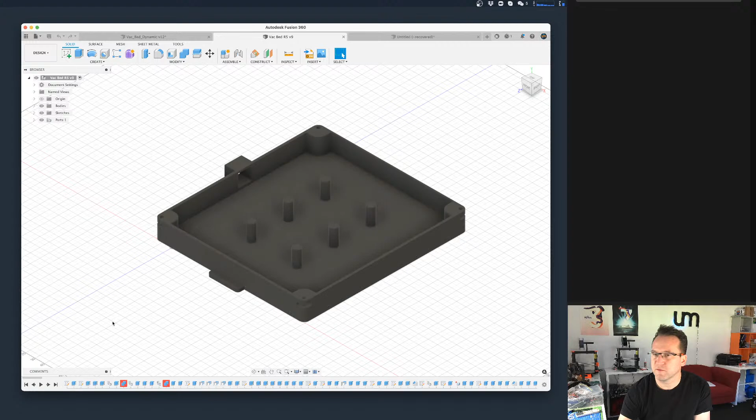vacuum bed file. So I've already got all my vacuum bed stuff, like it's all working for me, but it wasn't built - if you look at the timeline here, it wasn't built in a way that was very user-friendly for anyone else. So I've been redesigning this thing, spurred on by Jon Oxer, who...

So this has been spurred on by Jon Oxer, who keeps reminding me on Twitter that he's waiting for this. So what I decided to do was to make a version of this and then supply the Fusion file for people, and that way they can modify it. So it's all dynamic, and it's got some challenges into how to do it in an intuitive way that doesn't completely build

like a construction timeline that is going to break everything, right? I'm never asleep at this time. Day-night rhythm is, yeah - you obviously, do you have young kids? Or do you have kids at all? I don't know, I can't do the whole sleep whenever I want, work whenever I want anymore, because kids. We're committed to the Northern Hemisphere. You're committed to the Southern Hemisphere, because you seem to be always around. Zero kids? See, that explains it.

That explains it. So the whole thing is, as I said, I should save this. I just had to undo a whole bunch of stuff to make it work differently. So as you can see here, this is this base-driven sketch, and it's all done dynamically.

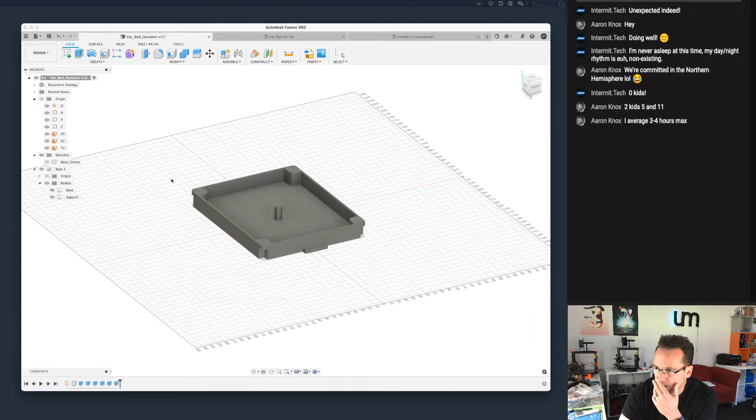So if I go back to here, the parameters, I can say that this is actually going to be, I don't know, 192 wide, and it does that. And I can say it's actually going to be, I don't know, 27 high and whatever, and it recreates all the different sections.

So it's got the screw areas. You can set the screw diameter, I'm using M2.5. The nut width, so this is set here for a square nut, so the idea is that it won't rotate.

On my version, I've actually got it like this, and you put the T-nut in there, but the problem with this is that causes a lot of problems with 3D printing and with overhangs and stuff, and it's very hard to clean this stuff out. So I'm trying to do it in a way that's easy enough to do - you put the screw in, you put the nut underneath, and it's a corner, so it stops it from rotating. So I'm trying to make everything dynamic,

and I should put that back. It sucks that you can't keep this parameters window open all the time. Anyway, so what I'm working on at the moment is the supports.

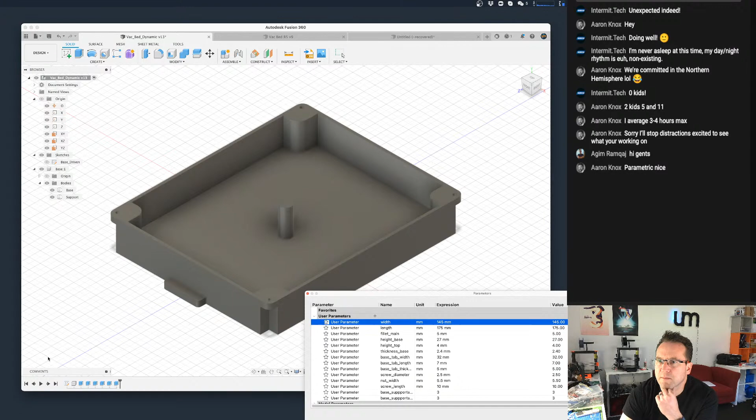Hey, Agim. So originally I had the supports as a dynamic layout inside here - so that's the support there. The supports were driven dynamically in the sketch. The problem was if you set it to zero, there had to be at least one of them. Otherwise it couldn't create an extrusion for something that wasn't there to start with, that you added.

Anyway, it was confusing, so what I'm doing now is I'm putting it as part of this sketch object. I really hate this whole thing, anyway, whatever. I'm using a new mouse, by the way, a wide mouse at the moment, and I'm really struggling with it.

It's a completely different shape and size mouse, and it's really annoying me. I've got new mice on the way.

I've got a separate support now, and I'm about to set up a pattern. I'm going to do a rectangular pattern, driven by this stuff. I can do formulas in the expression, but it's difficult - having it all tied together is painful.

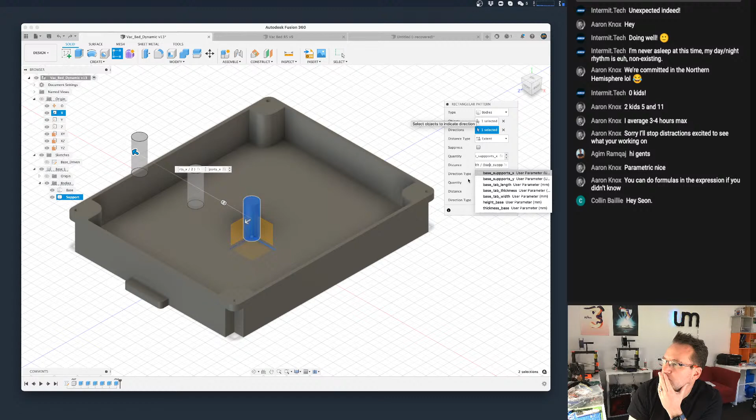I'm going to have to do some to the left, some to the right, because I can only do an extent or a spacing. Or I move it. Right, that might work. Okay, let's undo this.

So that's the extrude, but I want the extrude to happen after. No, okay, so I need an extrude, then I need a move. This has to move. Right, that's what I need to do.

So I need to move that body, and I'm going to be moving it minus width divided by the X support.

And I need to move it - which way is Y, that way? I need to move it minus, doesn't really matter, minus length, divided by support Y. Okay.

Yeah, I can't start it on the left and the right inside the sketch, but yeah, that's what I'm doing, Collin. And if I make that minus, if I make that plus, it'll be the top left corner. Okay.

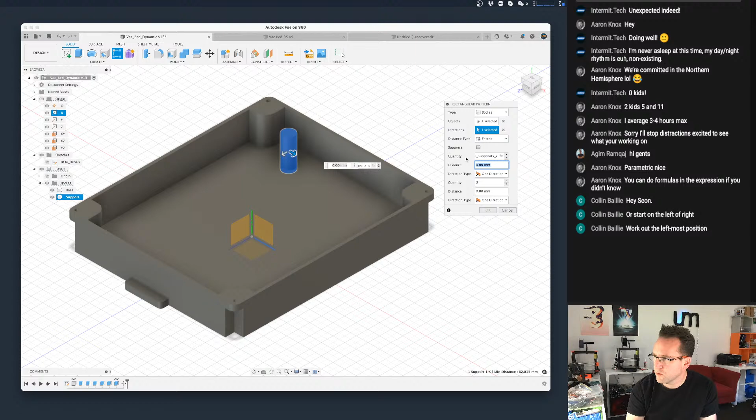I don't really have to set that, I know what I'm doing. So there's going to be base support X, and it's going to be minus width. It's going to be plus, it's going to be width divided by... that's not right.

The distance is going to be... right, so the whole width divided by 3, or divided by the number. Oh, right, I'm going to have to do it spacing now. Maybe? It'll be width divided by support X. Oh, but the offset.

What? I don't understand. Width divided by 3.

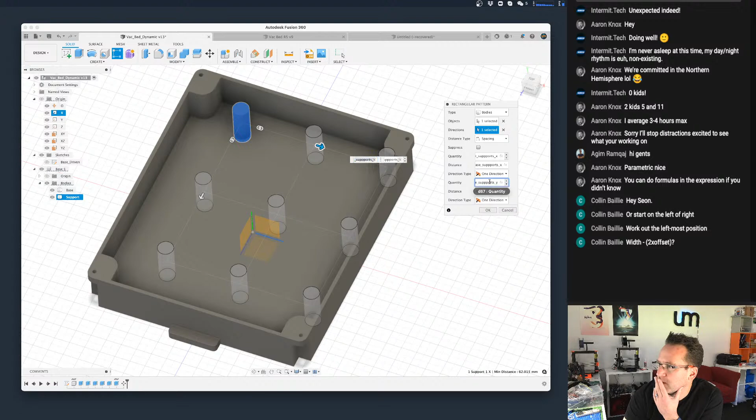So that one's correct. Why is that correct? Width minus 2 of the, but it shouldn't be, because look at the Y - the Y works, it's 3 and 3.

Oh, unless this move wasn't right. This move must not be in the right position. Okay, actually the Y doesn't work, because if you look, the Y is offset as well. So it's the initial move, I think, isn't right.

I think the distance, all these distances are right. So I'm going to just OK on this for the moment, and I'm going to just work on the... maybe, yeah, the move isn't right.

Why is it not stored, the move? I've edited the move. This should be showing me the values I had in here to get it there. See, that's there.

I want to edit the feature. It should show me the move values.

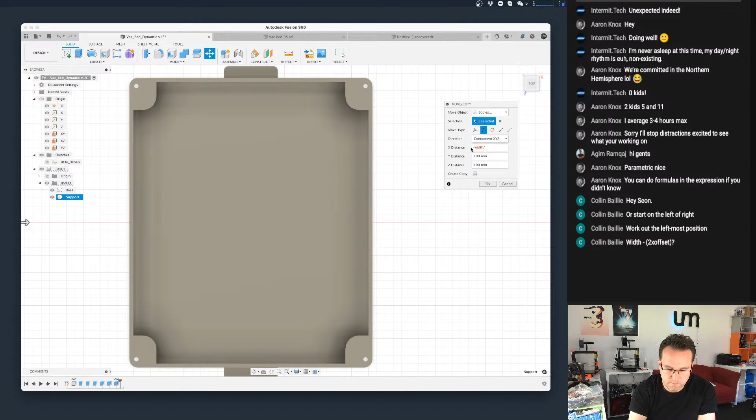Done. It's fine. I want it to go negative width, divided by... that looks further over than it did last time. This is length divided by...

Oh, is that not, is that, which one's Y? Oh, is that done up and down? Okay, that's annoying, because I changed the, if I change it to design.

You know what? Okay, that just broke that. This is awesome.

Hey Bruce, perfect cooking stream.

Okay, undo that, we're going to do that again. This has got to be a bug. This has got to be a bug in Fusion, that it's not remembering what the move was.

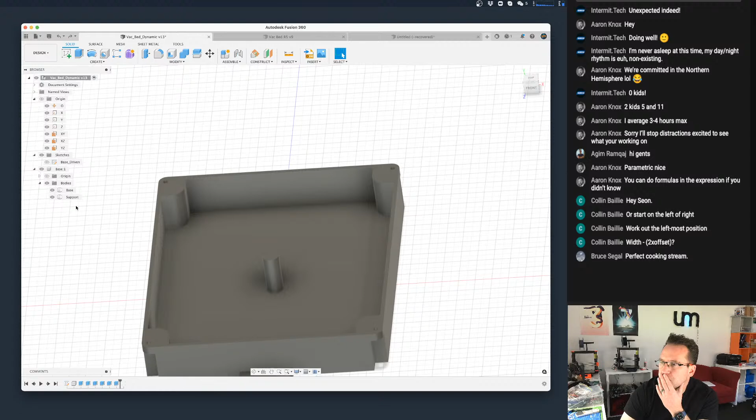Why is that going in the air now? I don't understand why it's going in the air. We divided by...

Where exactly are you trying to put supports? I missed that. I'm trying to, so based on how many supports you say you want on the X and the Y, I want them centered throughout the thing. So if I now move that over, right.

So that looks right, except I did the wrong direction. But if I come back in here now, see, I've lost the settings. It's not remembering the formula.

Okay, but maybe I can remember this one. I can go reverse this one.

Okay, so this is now placing them in the right spot. I don't understand why they weren't before.

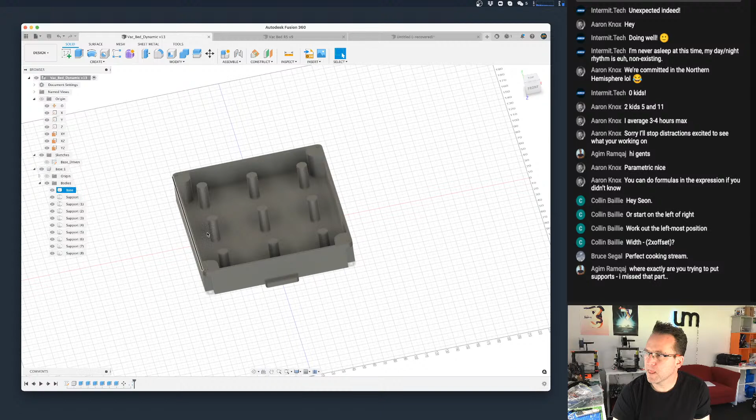Let me save this. Okay, so the idea is, I don't know if this move is going to work now, because the formula's not there, right? So if I now say, go and change this, I don't think it's going to work.

If I say I only want 2 supports on the X, you see, it doesn't move the Y. It's not moving this first one. It's not saving the parameter in the move.

So this isn't going to work. Like I should be able to say I want 5 and 5 if I want lots of support. It should recalculate this position here. And it's not recalculating that position.

I want people to be able to, remember, I want this to be completely dynamic. I want someone to be able to just go and modify these values and they will get all the pieces they need ready to export to 3D print, where they don't have to do any modifications to any geometry and whatever else.

But this is a problem because... I know what I can do. I know what I can do. Okay, I need to change this.

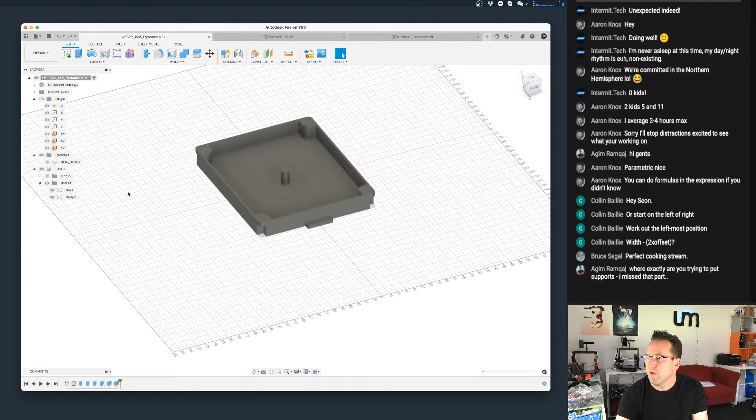Okay, what I'm going to have to do is I'm going to save that. Actually, I've got to rename that. The move has to happen inside the sketch. That's what I'm going to have to do.

So right now it's sitting here. I'm going to have to actually make this be, it's got to be constrained to... hello.

Right, this is going to have to be the negative width divided by support X. What's wrong with that? Negative width?

Oh, didn't like the space. Hello? Negative width, divided by, support X.

Oh, I know why, because it's constrained to the center. Okay, I need to kill, which one is it?

Okay, that's annoying. I'm gonna have to, how big is that? 5 millimeters.

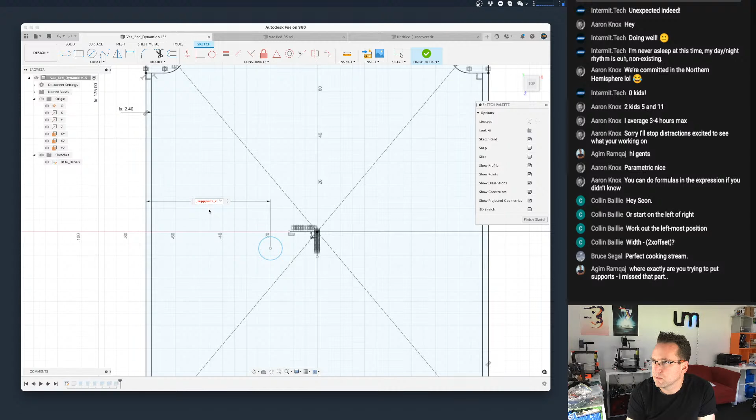Maybe I wasn't. Well, maybe that doesn't make sense doing it that way. If I'm locking it to the edge, it should be 1/3. No.

Right, I actually need to do it the other way around. I need to do it from the center. I think that's why. Wow.

There is a reason why I don't show this stuff on streams. Negative width, divided by support X. Why is it not letting me do that?

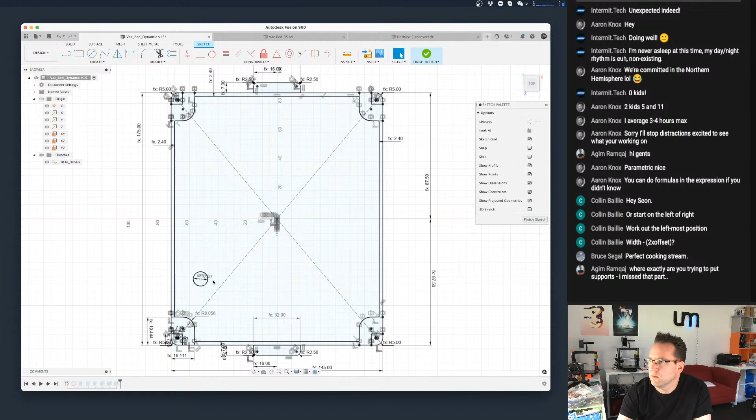I don't understand why it's not letting me do this. Circle, 5 millimeters. 10mm circle diameter, and I want to do...

Oh, maybe I need to do it for my construction line. Maybe negative width. See, it goes red automatically. I don't understand why is it going red? Oh right, I'm saying this is a direction and I'm trying to make it negative. That's not going to work. It probably would have worked before.

Okay, let's try this again. It's because I'm telling it to be this way. Actually, it's got to be from the center. Okay, this and this. Can't do it from the center. Move away. Right, and it's locked again. Oh my god, okay, I give up.

I give up, I give up. I was trying to keep the same one. Hey, Dutch Maker, I know I'm making this look really, really, really way more complicated than it needs to be. And you know what? It is.

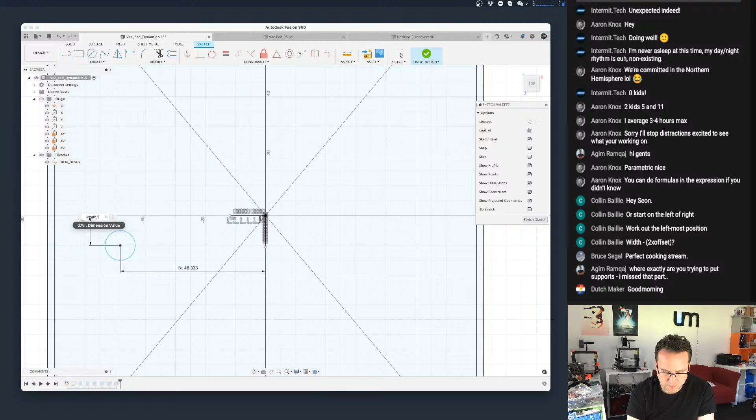D. Okay, I want this to be width divided by support X. Okay, and I want this to be... someone is pinging me... this has to be length divided by support Y. Okay, so that puts it in position, and that will now move based on the design. And this extrude is now... isn't the extrude.

The extrude is broken because I picked a different item. I need to now select that for the extrusion. And that's going to be a new body. Okay, support, so...

Save that. So this will now... it's frustrating that it's not in the center, right? But this should now... so the problem with this, if I say I want one support, it's not going to be in the middle. Oh yes it will, divided by 1, negative width divided by... no it won't. What happens if I make it be 1 by 1? Right, 1 by 1 is going to be out there.

Okay, I'm going to leave the 1 by 1 just for a moment because I think I know how to solve that. The formula is going to be different. It's going to be width divided by 2, half...

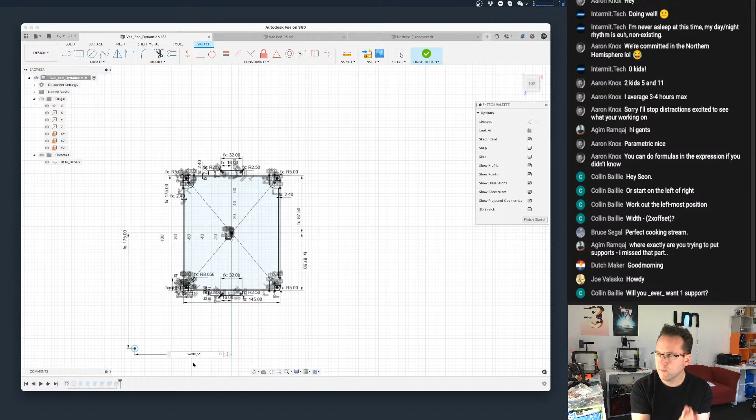Oh no it's not, I don't even need that. It's just going to be minus... no, the distance is going to be support X divided by... got 2 of them, I want it to be... oh my god, doing my head in. Will you ever want one support? I don't know, I need this to work and not break. Hey Joe, I need this to work and not break for people, for edge cases that I'm not aware of.

I don't want to have to be constantly... yeah. I don't know, maybe if it's small enough you only need one support because there are already supports on the corner, right? There are already supports here on the corner. If there's only one support, it should be...

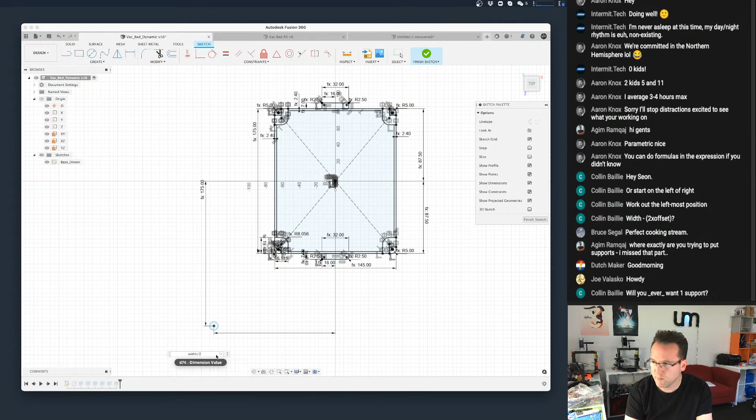So let me... oh my God. Width... it's the width, I don't want the width. Width divided by 2, I want half of that, and then I want that divided by...

This would work easier if the pivot point was on the bottom left. If the pivot point of the whole thing was here, this would be super easy. The fact that I need to move it to the left and then make them go to the right, when you can't do that within an array.

No, width divided by count plus 1 is even worse, because if it's width divided by 2, it's still going to move it. If there's only 1, it shouldn't move it at all. It should be in the center. The distance should be 0 if there's only 1.

So if it's width divided by support x, times... base support x minus 1.

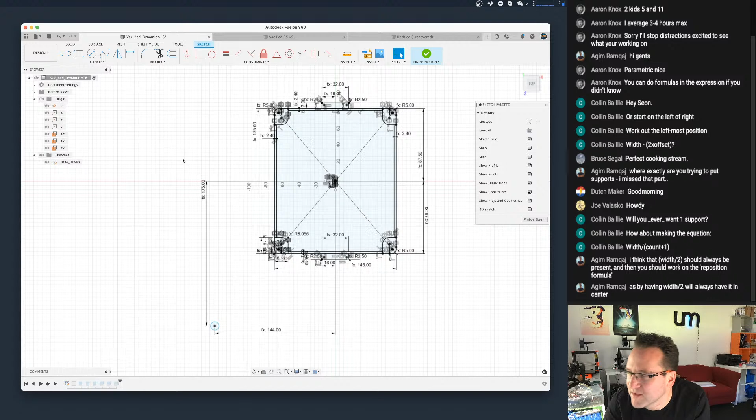No, I think that width divided by 2 should always be present, and then you should work on the reposition formula. As by having width divided by 2, we'll always have it in the center. No, it won't have it in the center - it'll only have it if it's pinned to the middle. Width divided by 2 will always move it away from the center. 0 will keep it in the center.

The only other thing I can do is pin it to the left and the bottom. So let's try doing that instead. Let's get rid of this and this. I think the issue is that I'm pinning it to the center and I can't get a 0 value.

So I need to go D. Okay, the dimension from here to here should be width divided by 2. We should put it to 0, put it to the middle, yeah? Minus... how many of them are there? There are 3, minus width divided by support x.

Well, I didn't like this. Width divided by 2. Oh, because I'm on the wrong side. Okay, let me redo that. Okay, let's put it back here. I need the... hello, I said move over here. Thank you. I think I need it to be the other way.

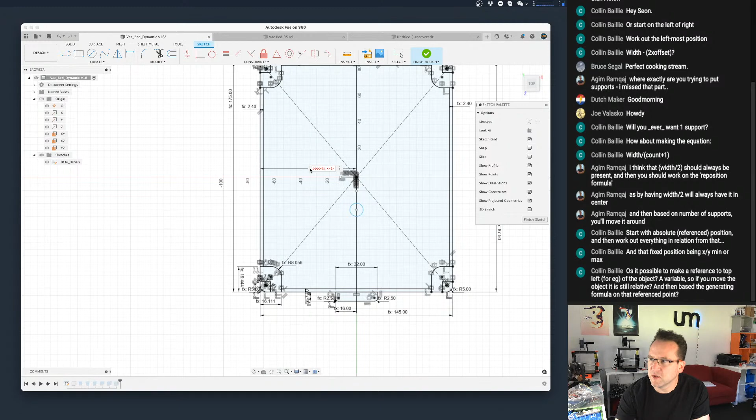I don't understand why width divided by that minus 1. It's not letting me put brackets on it, but I've put brackets before.

Wait, divided by 2, divided by 1. Or divided by 2, divided by thing. If I now make it 2, that's right. If I make it 3, 1, oh actually no, it's not right. Divided by 2, it still needs to be... that's going to put 1 there, then it's going to put 1 there.

Maybe. There is, but there isn't, but it is a reference point. A reference point is exactly what I'm doing now. The circle becomes a reference point.

Everything is, yes, it's all parametric. As you can see here, there's center rectangles, because it has to be pinned somewhere, and so it makes sense to pin it to the middle, because there's plenty of other stuff that needs to reference the middle as well.

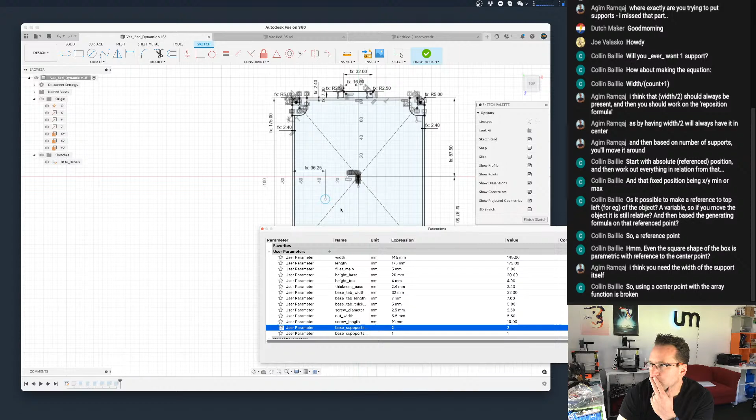That should be divided by x minus 1. I just don't understand why it's not letting me do brackets. Oh, that time it did. Wait, that time it let me do a bracket. What just changed?

One of them, will that break? 3. See, that's not changed. Okay, that's not working.

Still want the minus here. You need the width of the support itself.

So using a center point with the array function. Well, no, it's not broken, it's that you can't do it. With the array function, it's going to be this many left and this many forward. It's not what I want, I want this many and start here and go across over the pivot point. The array function is a 2D array from a point. So what I'm trying to work out is how to get to the point, but how to get to the point dynamically.

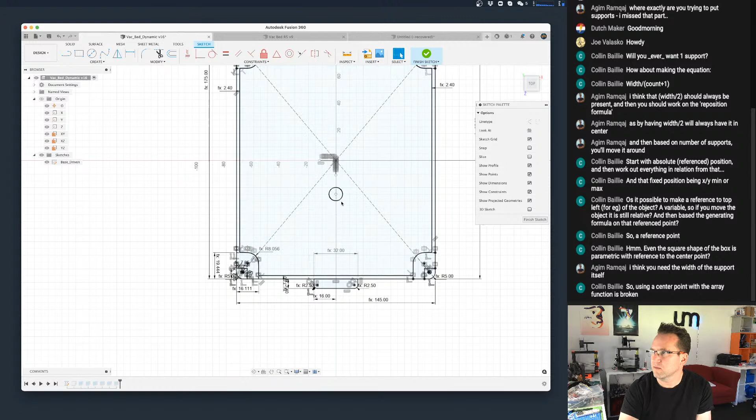It's just not letting me use things in the formula, which I don't understand because I've done stuff like that stacks of times. So unless I can make a formula in here and just use that. I know you can do that.

It is possible to create, like I'm pretty sure I can say, I can create a, if I call it support bottom, so support X left, and support pivot left, and I want it to be...

I don't think... where's this coming from though? That's the problem. Width, I want width divided by 2. That's my center.

And I want minus width divided by supports. Okay, so it let me do it in here, and I don't know why.

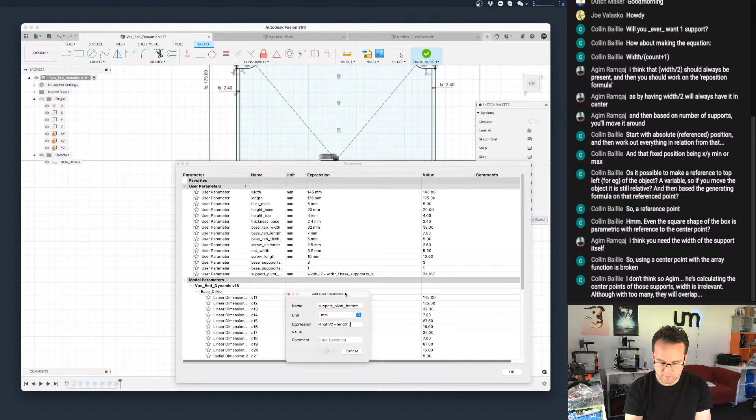Bottom, support pivot bottom, and this is going to be length divided by 2, minus length divided by base supports y.

Except there needs to be... so this top one's giving me a positive value of 24. I'm not sure that's right either. See, that's giving me bottom left. Right, that has to be minus 1.

That gives me a divide by 0. Oh, hang on. No. That's going to give it to me from the center, right?

Again, it depends where I'm grabbing it from. But this, for 1 and 1, this should be giving me a 0. Or this should give me a plus.

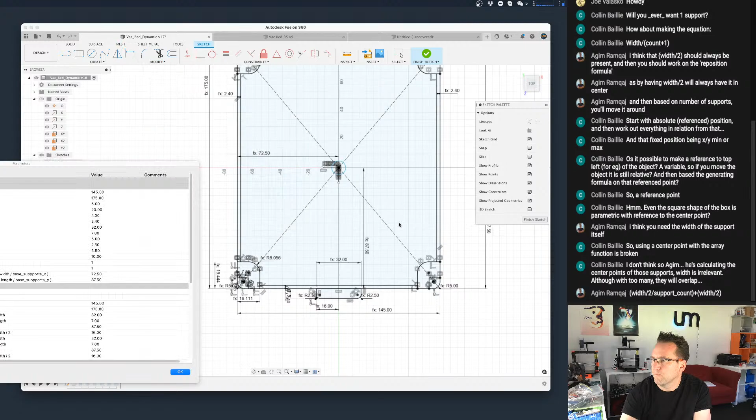And if I now modify this and say... so this is the bit that's been tripping me up for so long that it has put me off finishing this, trying to work this specific thing out. So if I have two supports on the X, damn it, and 2 on the Y, that's not right because it's going to give me 1 there and 1 here.

Oh, hang on, is it divided by 2 divided by? No. Width divided by 2 divided by support count, plus width divided by 2. Don't think so, you can try it. Width divided by 2.

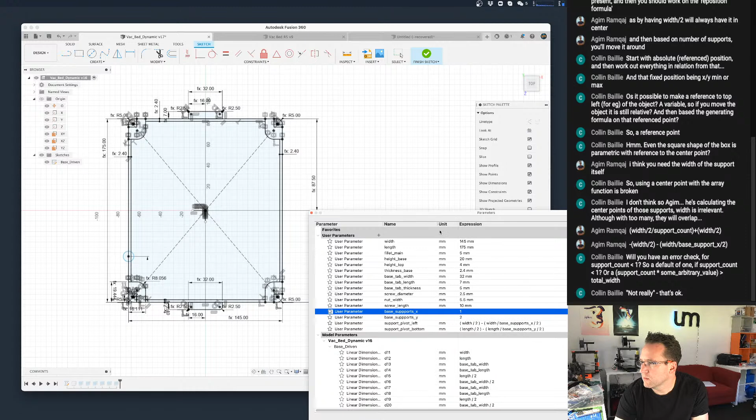Wait, what happened there? Is that the Y? No, 2. 1, no, that's not correct. 3. Yeah, no, it's not correct either. Want it in the middle.

Is the initial support parametrically generated, and then you need to make the array. Yes, now, I had all this working fine as an array in the sketch, but you can't do that. Because if someone enters 0 for support, the extrusion never happens. And then if they go and change it to 4, then there is no extrusion, and it breaks. So that's the problem with that.

Don't I just want divided by... This is just so annoying. I'm just going to go back to where I was originally. If I have 1, I want it to be...

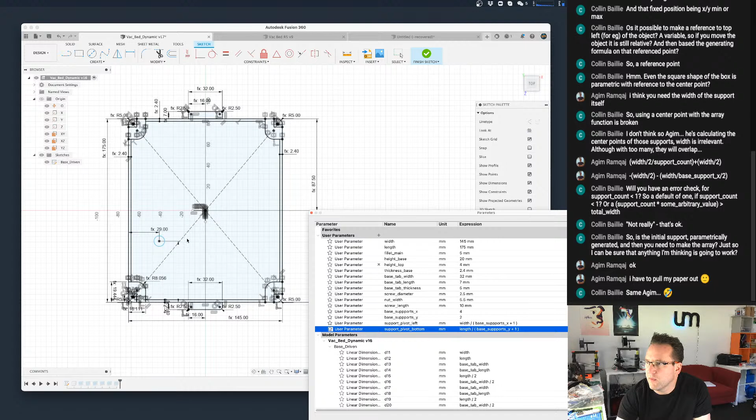Length divided by base support Y plus 1. 2 by 4 will give me 1 there and 1 there and 1 there. Like 2 by 2, okay, 3 by 3. I think this might be working. I think this might be working. Finish.

So now if I do this, I want to create a pattern, and I want this to be - I hate how it does that. This needs to be supports X, and it's going to be spacing of... spacing of what... of width divided by

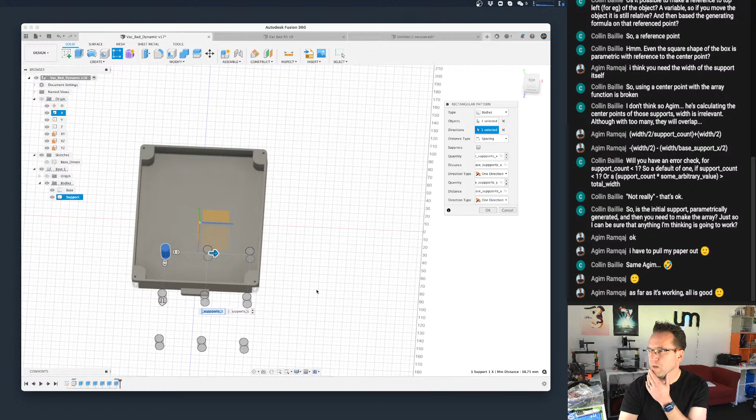support X. We're gonna have the same problem where I'm not going to be able to... support Y, and this is going to be length divided by support Y. I'm not going to be able to put brackets again. Oh, I didn't do the direction. See, this is the same problem again, where it's got to be divided by plus 1. And you watch, it won't let me do the brackets. And I'm going to be back to the same thing as before.

Oh, it did - it let me do the bracket this time. Oops, didn't mean to do that. Right, so let me do the brackets now. It must have been over-constrained before somehow. Distance is minus length, base plus 1. There we go.

Okay, so they're in the center, and if I now go to here and say actually I only want 2 by 2 - 2 by 2, they're in the center. And if I say I want 5 by 5, which is ridiculous, they're in the center. Oh my god! Oh my god! Now the problem is these are all separate objects, right?

Is the top of the page plus or negative? You don't work it out. Okay, so 3 by 3, right? Oh, interesting. Why is that?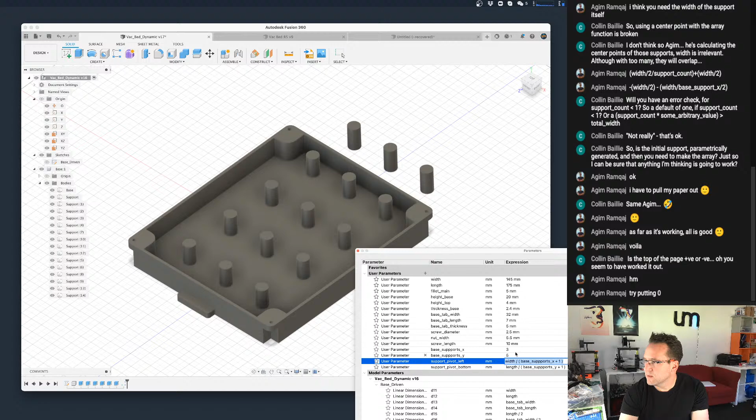I must have used the wrong spacing. Hang on, I might have used the wrong term for each one. This might be the Y. That's that way, and then this one should be that way.

No, I thought I was using the mix, but I'm not. I am, I'm using the mix. That's why. Okay, yep, I did, I had one mixed. Of course I did, this is Xeon.

Everything's hard. 4, 2, 1 by 1. Yay, yay! Okay, 3 by 3, just put them back to 3 by 3. Okay, that was way too hard.

So the problem is, okay, that's the base. So that's the base. Now I need to work out how I'm going to let someone cut the hole in the side for the vacuum.

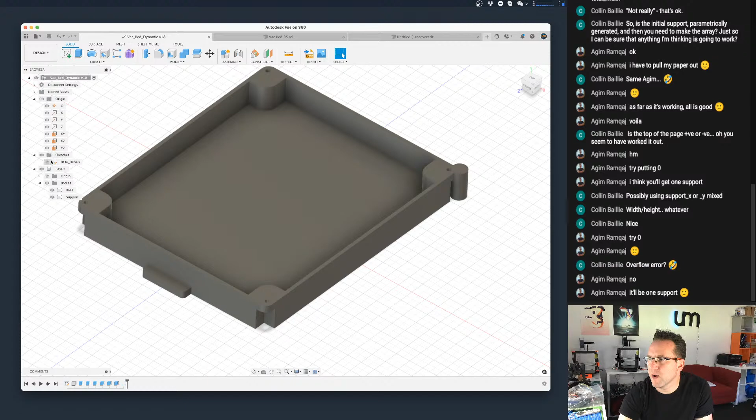Thanks for wrecking it again. Thank you, much love. Right, so...

Oh actually, wait, I forgot I did it in formula. So, base plus 1. So this needs to be, but that should be, even that's 0, it should be divided by 1. It needs to be divided by 2, and there should always be 1. So this needs to be, I think I can do this, min 1, comma, maybe I can't.

Expression entered failed, unknown result provided. I can't remember how to do a max and a min.

You're out! Quindor, stay awake all night. Thanks for joining, mate, appreciate it.

I need to... need to go to Fusion 360. What is it? Parameters min max.

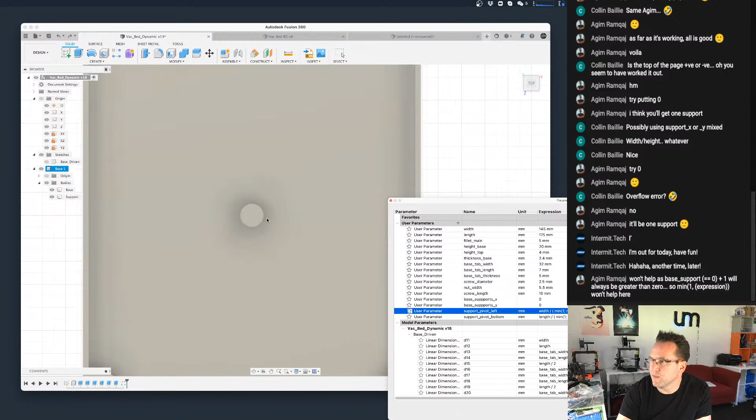As I said, the syntax on some of these things is a little bit weird. Oops. Okay, so if I now go at 0, 0, see that? It's giving me 0, it's giving me 1 now, and 1 should be the same. And 4 are now wrecking the position.

Now I broke it. Why is this broken now?

No, I need the min part. The min part is what's stopping it from going over to the side. But the max part wasn't the problem before. Removing the min, how? The problem is it's staying at 0, 0 all the time.

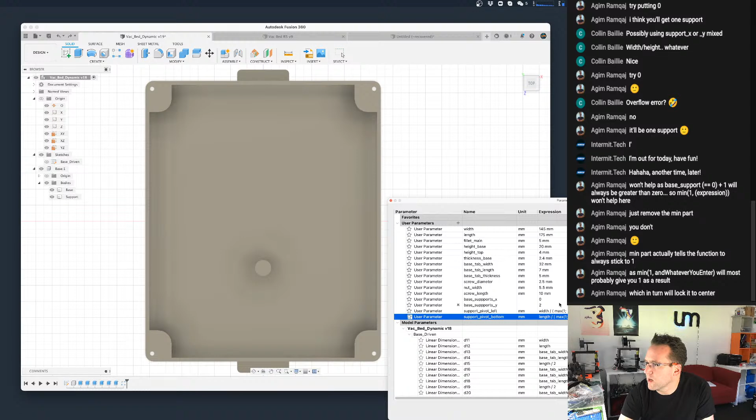Except that's not now, why is that not multiplying out? 1, 3, where are they? 2. It's multiplying out if there's something on width and length.

Right, that could be my formula here. Y, Y, X, X, that's right. Quantity, y, change parameters.

2, 1. If I go 0, it's doing 0 on the y as well. The position is not, but the number of. If I go 2 and 0 here, see, it's doing that on both.

So that's not the min 1 expression. It's using the count value. Right, but that's the same as saying that's 1. Right, I see what you're saying. The zero is giving it a divide by error.

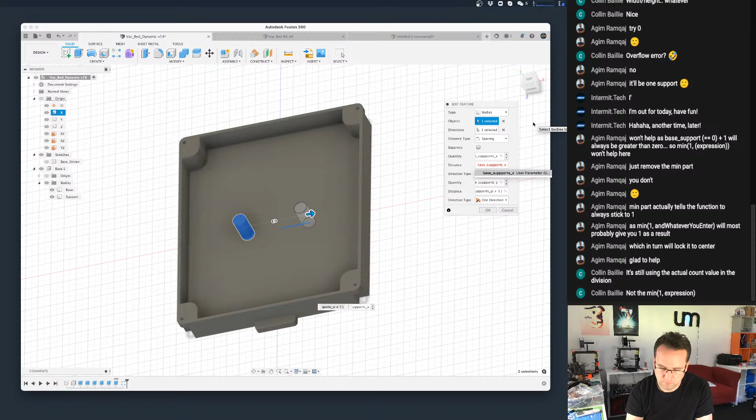Did that save it? I don't know. So I go 0, no, it didn't. So 1 works. If any of these are 0 though, it wrecks the other one. Gosh.

Why do I do these things to myself? Why do I ever volunteer to release these files? Seriously. I've spent more time trying to work out the maths on this than I spent designing the original version.

Oh, hang on. It's this way. The direction's flipped.

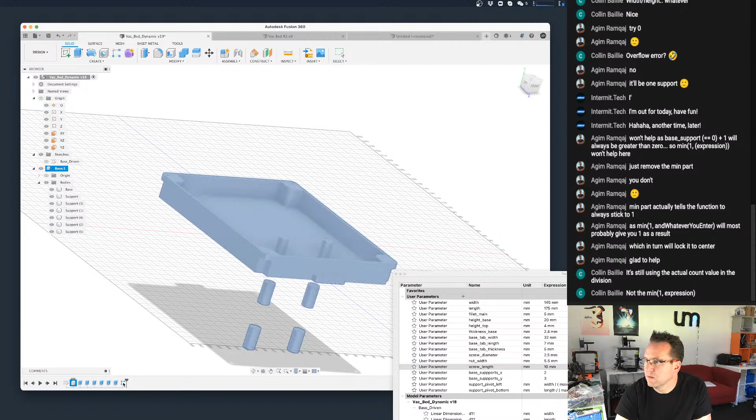That's why it looks like it's not working. Look at that. What the hell?

Oh, no way, there's a symmetric option. There's a symmetric option. And the symmetric option would allow me to do it from the center. Maybe.

I want this to be... just bear with me a moment. I'm going to break it all. I'm going to break everything we've done.

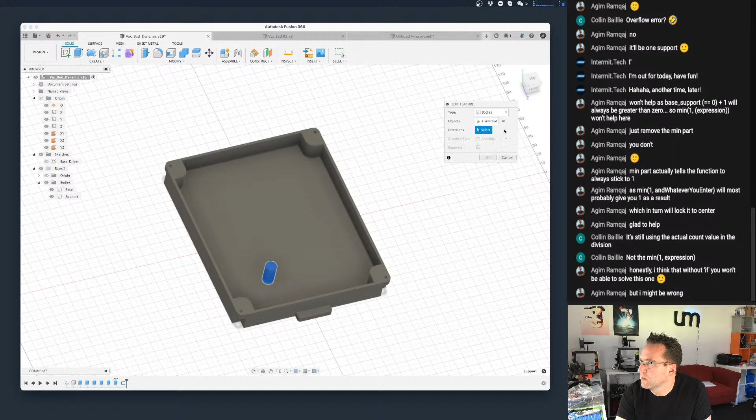I don't understand why it's going in that direction though. It should not be going up and down. Directions are... why can't I select the directions?

Okay. You're going to all scream. Scream, scream for ice cream.

I'm going to... oops, I'm going to do a circle. I'm going to do it 10. Finish.

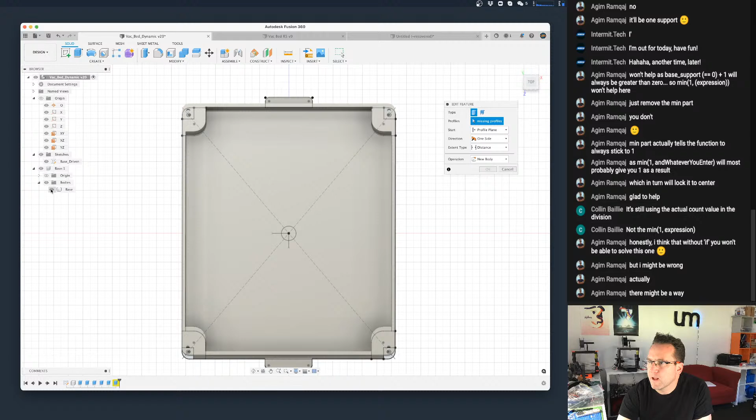And then this, I'm going to... okay. And then I'm going to do create pattern using this body, and I want it to be...

That's okay, I'm going to make it. It's going to be support, it's X, and it's going to be symmetrical, and it's going to be width divided by...

We're still going to have the 0 problem, but we'll get to that in a second. I don't know what I've got it set to at the moment.

Why isn't—see, symmetric should be going both directions. Why isn't symmetric going both directions?

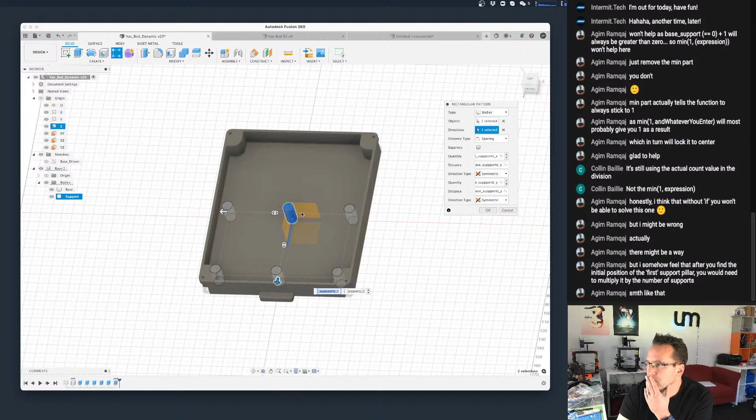So that worked, you see that? But why is the other one not working? I don't actually know what I've got it set to. What have I got these values set to?

2 and 3. If I go 1 and 1, 1 and 1 puts me in the middle. 2 and 2. Oh, it's going to be alternating. 3 and 3, see that?

It's alternate. It's got to be an even number. It's got to be an odd number. It's got to be an odd number. If it's not an odd number...

Okay, so symmetric is not what I thought. You see that? It's got to be 5. It's got to be an odd number.

But I somehow feel that after you find the initial position of the first support pillar, you would need to multiply it by the number of supports?

Yeah, I'm not sure that's going to help me either.

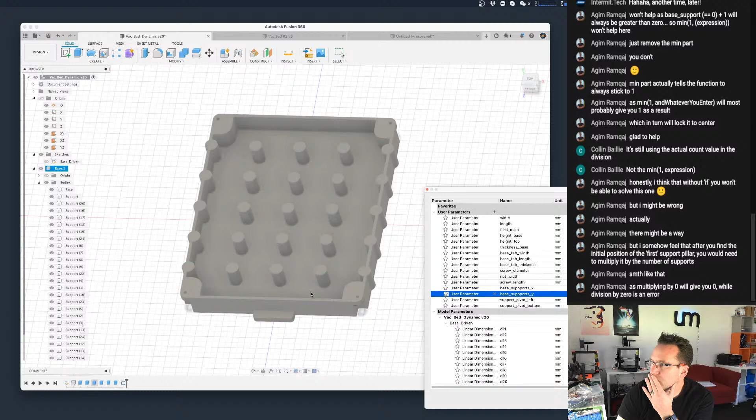We had it before, and I think what happened was my dimensions got broken. God, I'm going to spend the whole stream doing this.

Feel free to let me know in the chat right now, or in the comments after if you're watching this later, if you're sick and tired of watching me struggle on these streams, and if you want me to just stop streaming. Because I'll totally understand if that's what you want. Totally understand. Totally.

I think my dimension on this got totally broken. So this should be support pivot left.

And this one should be... I think this one here got broken. Support pivot Y, which is why they started going up and down.

Why is that not liking that one? No, that's not right. I said support pivot bottom. That's the one.

4 AM speaks for itself.

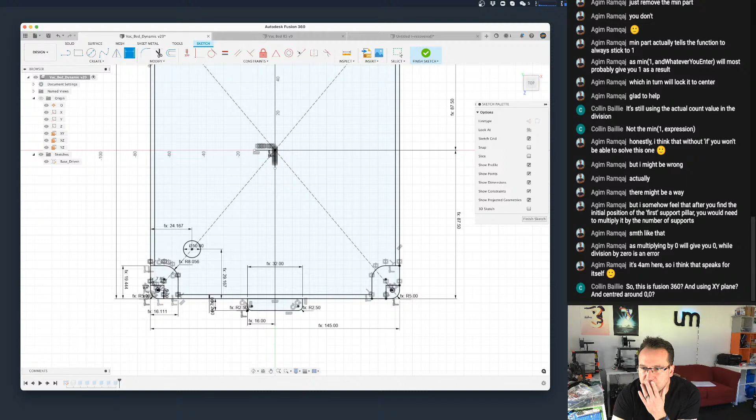So this is Fusion 360, yes, using the XY plane and centered around 0. For the sketch, yes, that's the 0 mark in there, you can see. 0, 20, 40, 60, 0, negative 20, 40, 60. Yep.

You work and listen to my streams, sure, but this must be frustrating for you. I know it's frustrating for me, so, you know. I'm glad I'm doing this on my other channel, though, and not on my main channel, because people will stop watching me.

X, and that's width.

And direction... no, direction, and that will be negative.

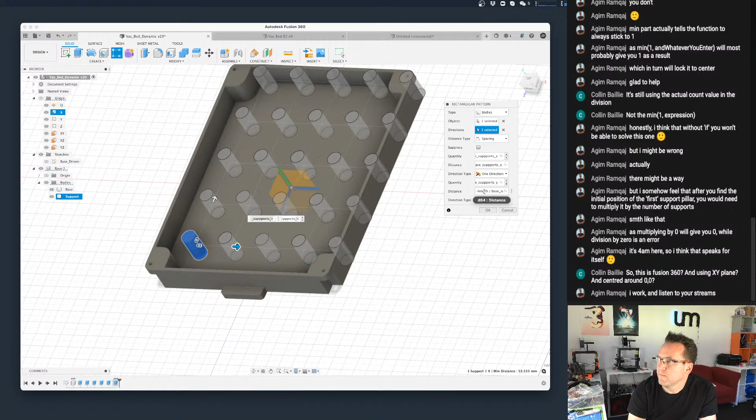And it's going to be the +1 again. It's going to be divided by max 1 x plus 1.

Okay, and this one's got to be bracket max 1, comma support y, plus 1.

Okay. Hey Joe, the brainstorming streams teach a good problem solving lesson. This is not a good problem solving lesson, as in, I'm not doing a good job of showing you how to solve it.

Okay, this might have it. This might be it. I enjoy a challenge like this. I just think me doing it on a stream is not great.

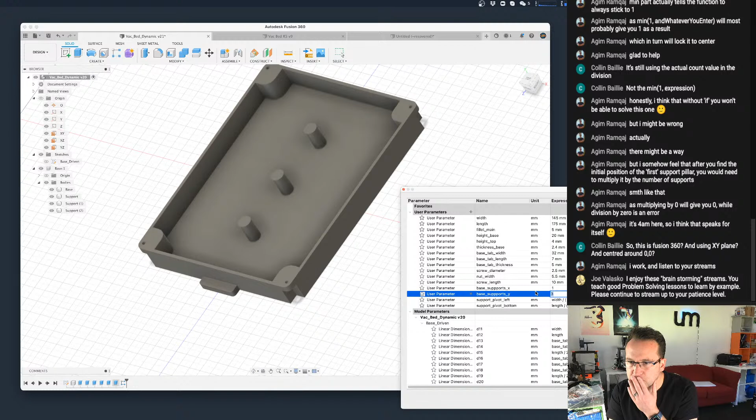It's close, very close. I feel like as long as it doesn't break, that 0 is just a case that we don't support. I mean, if someone sticks 0 there and it does something weird, that's okay, as long as it doesn't break. I think I'm okay with this.

I can do 2 by 2, I can go 3 by 2. Okay, we're gonna move on from this.

Oh my god, it's 10 past 1. I've not had lunch, I've not even had breakfast. Ooh, sorry.

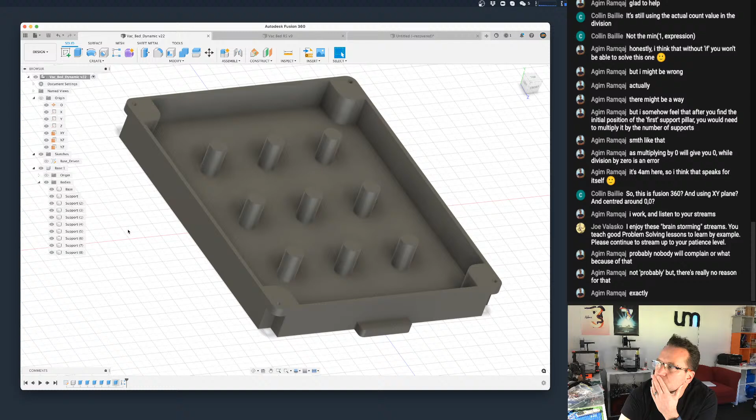Right, what I can do, instead of doing it as a sketch though, is I could do it as a hole.

And I could... so the distance is going to be 2 times thickness, length, width, base tab thickness. Which one is it? It's the base thickness, and I want it to be simple.

The width of it is going to be the height, times 0... so 80% of the base height. Yeah, circle's not great. Circle's going to reduce the amount of airflow.

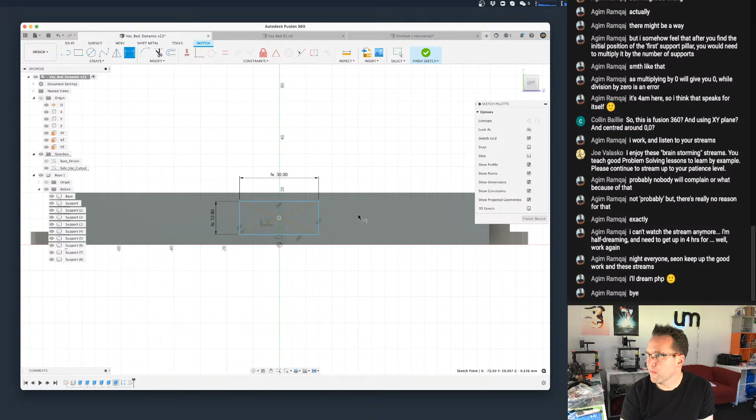I don't have anything on the same plane. That'll be interesting. So that'll be length divided by 2.

No, it's going to over constrain it. Oh, of course, what am I doing? I can't stick that on a... I'm in the sketch. You're an idiot, Seon.

And that wasn't in the center. Got to turn the base off. Actually, turn them all off. Okay, so let's try that again.

I want the center to be... going to be height of the base divided by 2. No, actually I want it to be divided by 2 plus base thickness. What?

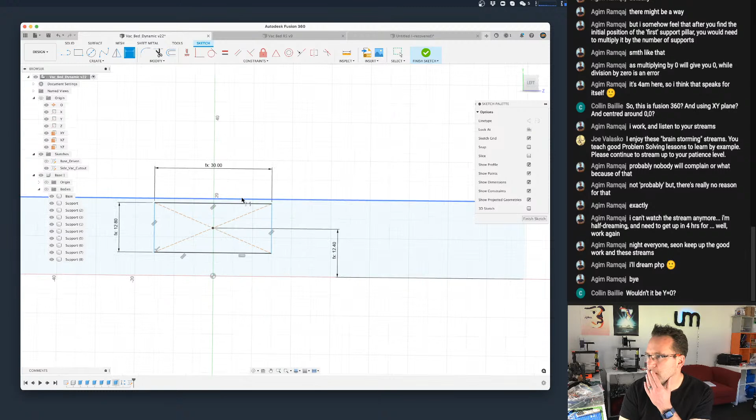Wouldn't y equal 0? No, y equals 0 is here, and you can't do a y equals 0. It's got to be relative to the side. If someone makes it higher...

So I need this to clear the bottom, right? Because there's a base there, like there's thickness to the base. But I want it to be right on, actually.

Okay, even easier, easier. Although it might be over constrained. I just want that to be thickness base.

Right, and I want this to be... right, I shouldn't have even done that. Right, I didn't even need center one. I want this to be thickness base as well. Okay, that's what I want.

And then I want this to be... this is where it's going to get a bit harder.

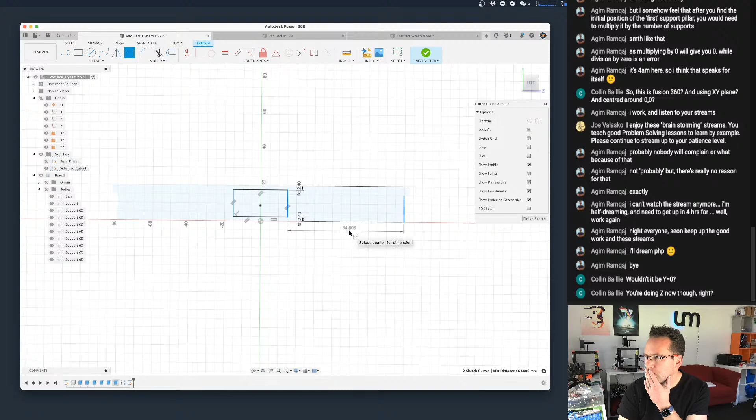I don't have a center reference, so I want this to be length divided by 2, minus height. Well, that should give me a square.

I'll do the same thing here. It'll be base, what was it, length divided by 2 minus height. Right.

I'm doing, no, it's not Z. It's not Z, it's the side. See here? And I want this to extrude minus thickness base. Is that the right amount? And it's going to cut.

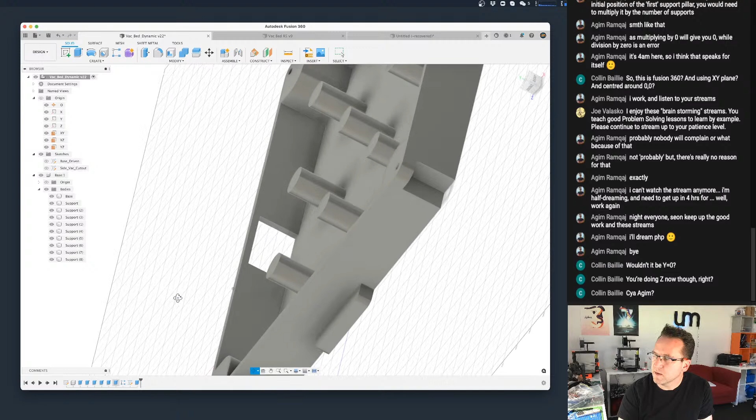Okay, so there's the hole on the side that the vacuum is going to connect to. And so I should, if I save that, I should now be able to...

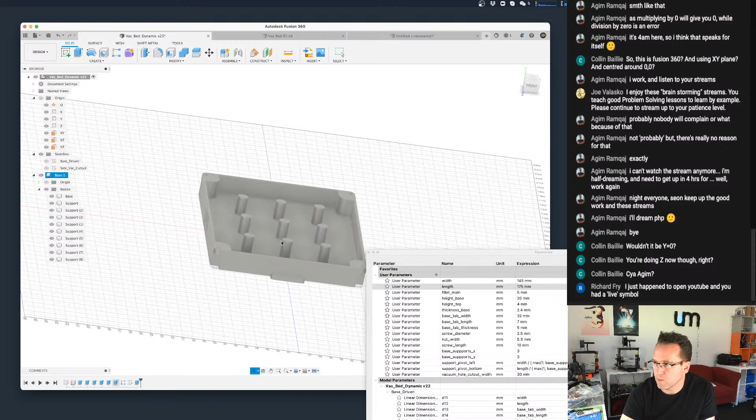By the way, the 145, 175 is based on my size, so people are obviously able to change this if they want to. Okay, so that's working. But what I should have also done is, in the sketch, I want to add some screw holes.

And this is going to be screw diameter. And it's going to be how far away? 5 millimeters. Yeah, that's fine. And this should be...

I don't know if I'm going to... how do I do the center of the length? Can I get to the length of that? Or am I going to have to just make this... it's going to have to be the center of this to this. No.

Hello. 1, 2... thank you. So this is going to be height base divided by 2. Okay, so that should be the center, and then I'm going to copy and paste that. And that is going to be there to there, is going to be, hello, no, D. There to there, going to be 5, and there to there is going to be height divided by 2. Okay, so I got screw holes.

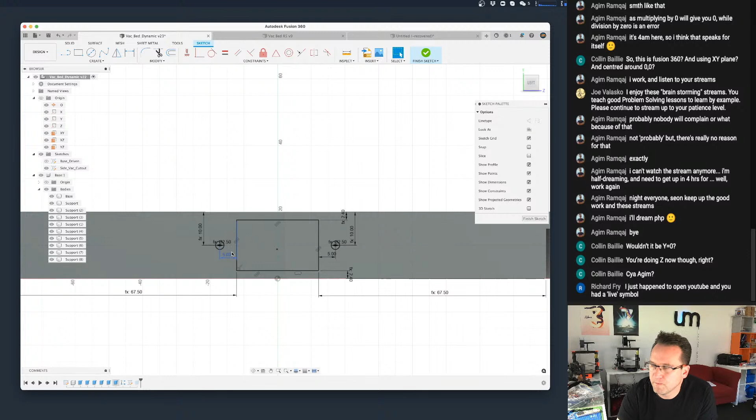Now what I can also do though is, the problem is everyone's adapter is going to be a different size, like everyone's hose is going to be a different size. So I'm also going to need a... just thinking out loud right now. I don't want to do that. I want to use the same sketch for the adapter outside.

So I'm going to need another rectangle that's going to be, I have to be careful if I lock it or not. I'm just going to do it out here for now, so I can then constrain it back in. I want this to be...

Going to be thickness. Okay, and that is going to be thickness. And that is going to be, um, 10, and just for now, I can always change that later, 10. So...

And then what I also need is a circle centered to the box. And I don't remember how big mine is, my adapter, but right, I can't do that yet. I need to add another modifier.

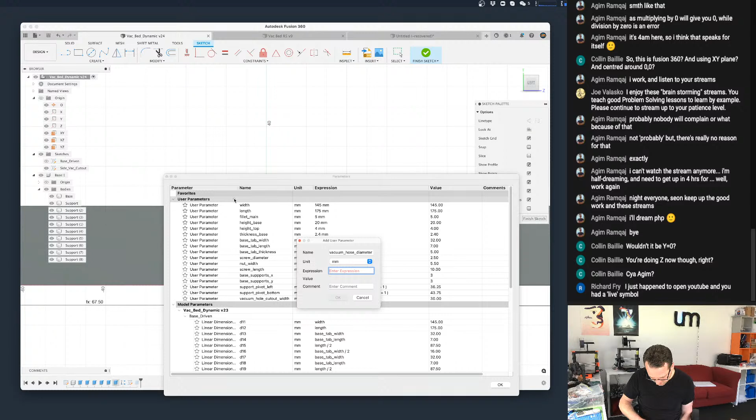Diameter is 31. Oh, it gets wider. Let's tape it a bit. 31.3, we're going to call it. For me, anyway, 31.3. Other people can change it. 31.3.

Okay, so now I can do a circle that is in the center of this. That is the vacuum hose diameter. Wait, that's looking for the radius divided by 2. There we go. Okay.

Finish. So now I can turn that on. So I can build the adapter out of this now. So I can grab this and...

Think, Seon. Think. Well, actually, I need to also... I need to add the screw holes in the wall.

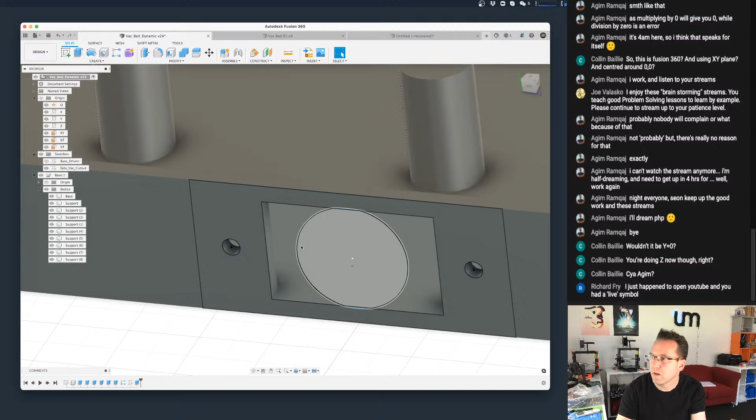Okay, and now I need to create a new extrusion. So extrude, you pull that face out, and that one out. How big am I going to make this? I can't think, just for the moment. I mean, this is going to be pretty ugly, but 10 millimeters.

So the idea is the vacuum plugs into that. You can even go, maybe, can't quite go all the way through. We're going to have to adjust. You see there's got those little bits there, right? That's what the vacuum plugs into, but I want this to be a separate piece. It won't be part of the 3D print, because I want people to be able to print it flat.

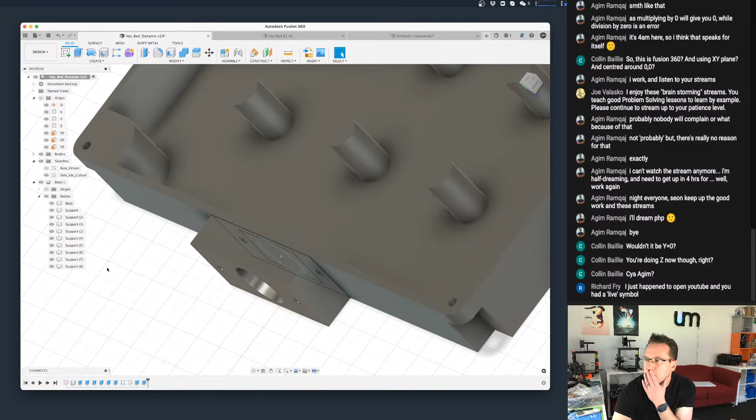So this is going to be its own body. Just for the moment, I'm going to call it - I was going to do that, and it's going to be interesting. I don't want it, I actually want it to be in a new component. This is going to be called vacuum adapter. Right. Extrude.

And that, I want that to be in here. So this is now a body in here. It's a separate piece. So this is the vacuum adapter, still driven from the same data, but not part of the base. If that makes sense, see that? So that'll get screwed on.

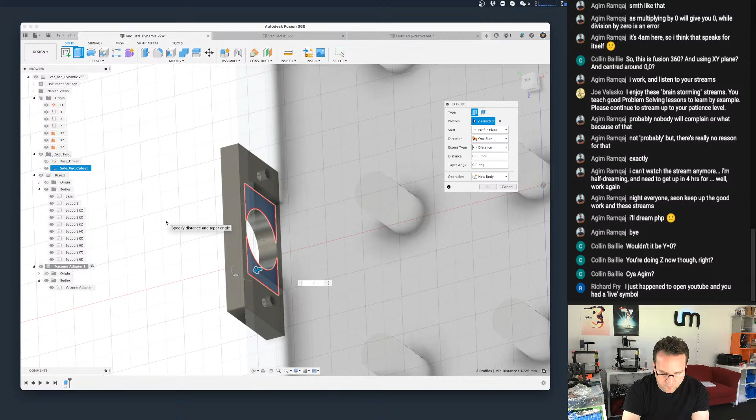And what I could actually even do is try to think which way it's going to get printed. Printed that way. If I actually extrude that and make that negative thickness, I mean, the tolerances on this is going to be tighter.

But that could then slot in. So it'll make the seal even better. And it would print face down. The problem is the vacuum hose hole is actually bigger than the space we've got for the height.

But if I go here now and say - but this is not going to make it dynamic. Like if this was 22 millimeters high, it's readjusted itself. It's not moved the circle higher. Right, the circle stayed still. Everything else moved, but the locking of the center of the circle didn't work.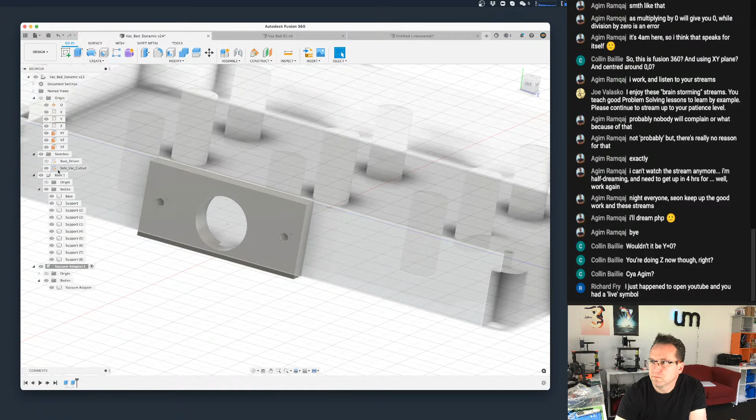Okay, that sucks. I'm gonna have to do that not by tracing the center. I'm gonna have to do it mathematically. That's a pain in the backside. So see this circle? It didn't move. So what it actually needs to be is D.

You see this needs to be height, base height divided by 2. Now it's going to move with it. Finish. Right.

But if someone does this, changes parameters, and they make the height 17 millimeters, it's going to cut right through. See that? Now, I mean, that doesn't really matter, because at the end of the day, it just means they can't get the vacuum cleaner in any further than that little space.

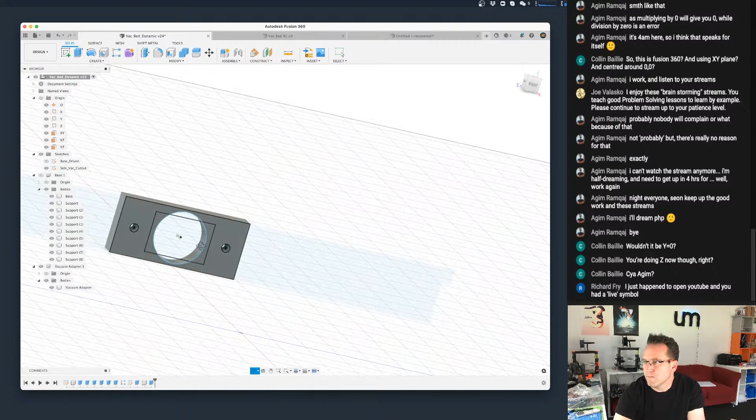Does that make sense? I hope that makes sense. Like, that'll still connect, but I'm thinking of getting rid of this. It's going to make it really hard. Yeah, I'm going to delete that. Anyway, so, but they can make this bit thicker, which will still hold the vacuum. So that's going to work.

It's going to work. So they screw that piece on, and that's how they attach their vacuum, and that's all dynamic. At some point, like if they make it really, really narrow, like if they say it's like 12 millimeters high, well, that's not going to work at all, right? See? But I don't know how I'm going to prevent people from doing that. Like, there's almost no point. If it's for a stencil printer, like, you need to be able to get the vacuum in.

So, yeah. At some point, I have to stop being concerned about the model breaking if someone does something stupid.

Okay, save. Now, we need to do the top.

Wow, what's the time? How long have I been streaming for? Almost 2 hours. Holy moly, Batman. Okay, that wasn't even funny.

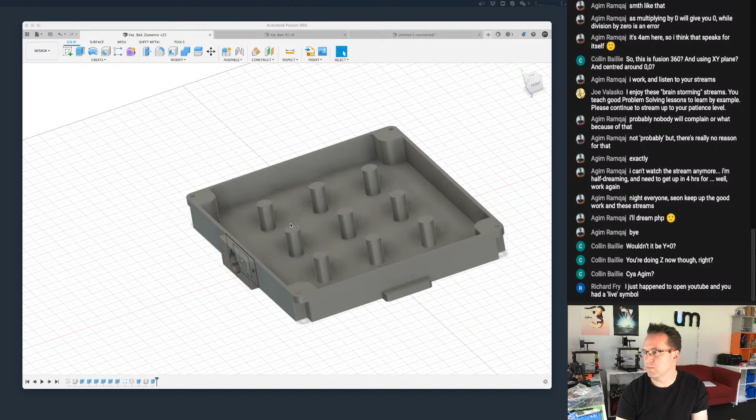Okay, we should look at doing the top. So that's going to be another component, at least the start of the top anyway. This will be the base top. Top or cover? Call it a cover. This is going to take a lot of work, by the way.

I'm just going to turn everything else off. This is where it's going to get interesting, because I don't necessarily have everything I need in this sketch right now. Well, that's not true, I've probably got enough. So we're going to extrude this, and this, and this.

Hey, Marius. Surprise, surprise. Imagine seeing you here.

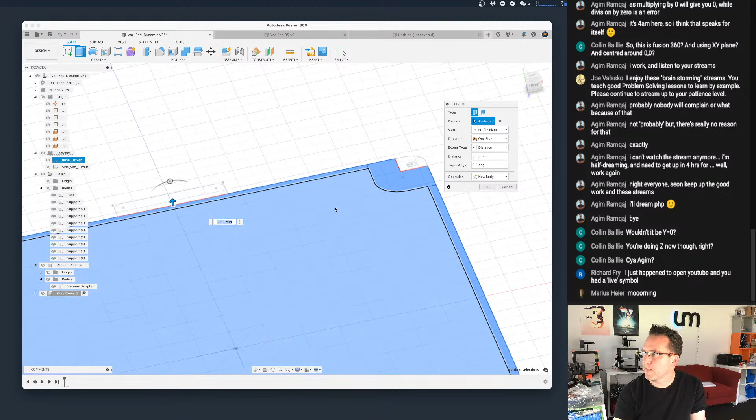Okay, and I can't remember if I actually put a thickness for the top. I didn't, but it should be the base thickness. Okay, new body.

And this is going to be our... click on it, what happened? Okay, maybe I didn't click on it. This is called the cover, and this cover is going to have to sit at, and get moved up to height. Oops. Oh, there is a height top. Wait, what am I using height top for?

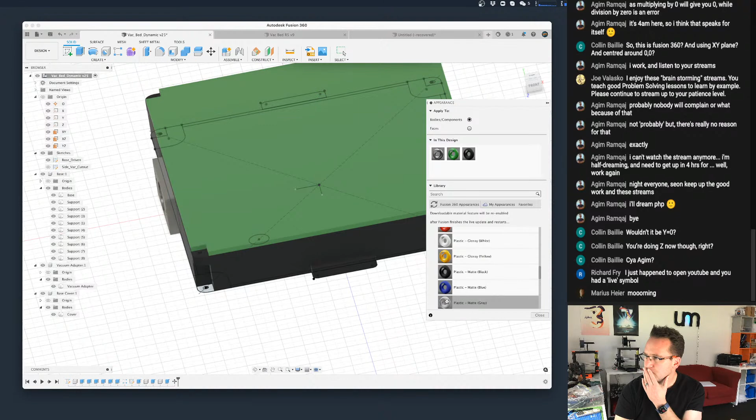What I should do is go to my appearance and actually set some textures on this. We're going to make them just plastic, opaque plastics, let's go. Let's put a green top. Is there a darker grey? Let's do a matte black base. Let's go a blue adapter just so we can see things easier. And the insides are going to just still be whatever the grey is, right? That's fine. So that's our top.

Oh, silly boy. Didn't select it all, got to select it all. I need that because I need the screw holes. That. Don't know what I was thinking then. And that. Okay, that's better.

So that's how we screw it together, right? Screw goes into here, and the nut, oops, and the nut is under there, and that screws together.

Let's just save that. I want to see what my top height is. I did a base height, base, oh right, I did give it a thickness. Base top, a height top. So that extrude should have been height top, 4mm.

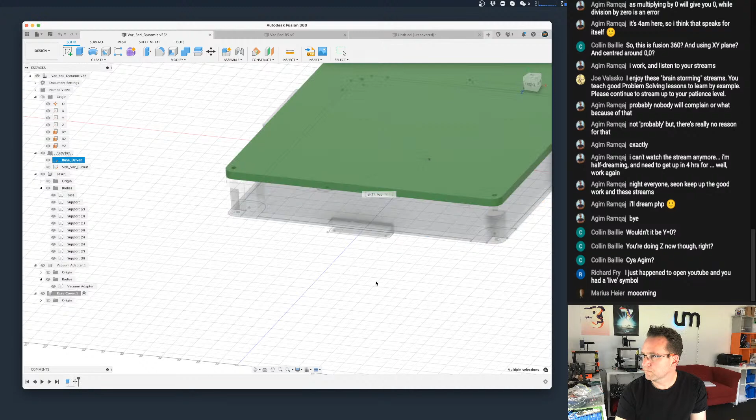Good, okay, yay. So once again, just going to save that. If I go and change my parameters and I say I want the height of the whole thing to be 27mm, that didn't move.

Oh, because remember, this is not saving the parameters. It's not saving their parameters. Do you remember that problem? Yay, we had that before.

Okay, so maybe what I could, how do I, okay, where's... Fusion 360 lock body to face of other body. Okay. Can't spell. How do I align a body? No, solved, offset all faces on, no. Position components relative to bodies. That sounds interesting.

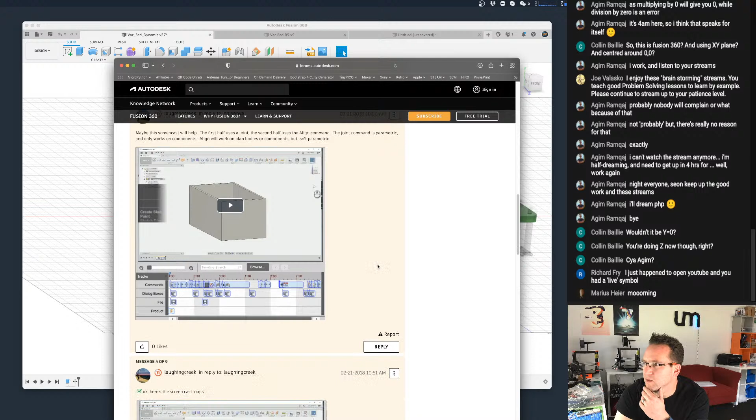Best practice would be to make a box, oops, a component, and then use the joints. Half uses a joint, I don't want to use a joint. I mean, it doesn't have to be, like when you export it, it can be at 0. It doesn't matter, it's just that I'd like to visually have them all together properly.

Do I have to ground it, do I? Yeah, I don't want... adding joints is absolutely not what I want to be doing.

So Fusion 360, move using formulas, losers, formula, wow. How to use equations? No. Using driven dimensions. Move body. How to move? No. How to move a body from one to... no.

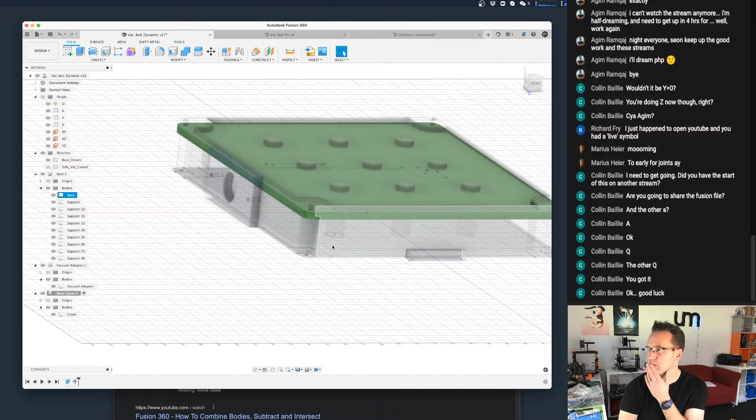Actually, no. You know what I can do? This is ugly, this is really ugly. Oh, I know what I'm going to have to do: two extrudes. Check this out.

I need to extrude this, height top plus height base. Yeah. Let's get rid of the move because that's not right. And then I'm going to extrude it again.

Let's get... Why is it not selecting at all? Body's off, there we go. Then I'm going to extrude it again, and it's going to be minus height base, with a cut.

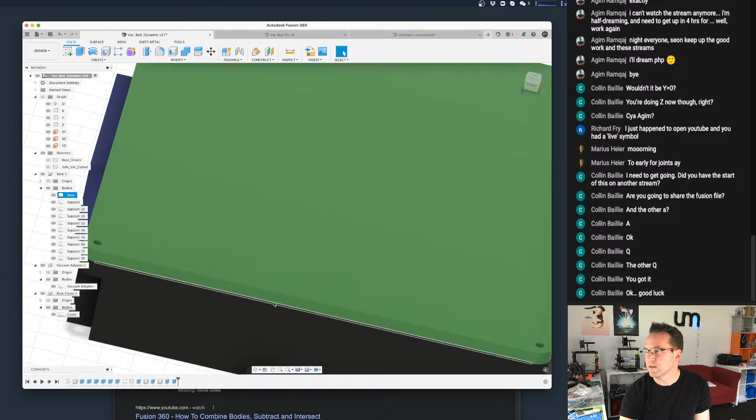That is ugly, but check this out. So there's our shape. And if I change... oh, they weren't supposed to go through the bottom. That's interesting. Doesn't matter, that'll be fine when it exports.

If I go now and do a modify, change parameters, and I make the height now back to 20, the lid is on top. Yay. If I make it 45, it is on top.

Look at that side adapter. That adapter is getting ridiculous, it doesn't need to be that big. I am going to have to adjust those values. That's crazy. 20.

So that's working. Okay, how's that for nasty? Now we're going to do the dynamic generation of the holes in the top. That's going to be for another stream.

I've been going for two hours and I think I'm going to stop. But this has been actually quite a good... this has been good. It has been. I'm going to save this.

I'm going to just quickly, though, I do want to fix this or I'll forget. So I made the dimension length divided by 2 minus height base, and I don't think I want it to be that wide.

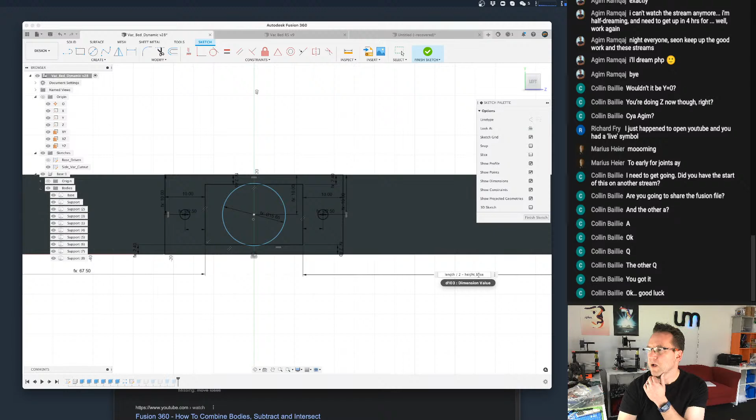But I can make it the max of height base... wait, no, that won't work. Okay, no, that won't work. I'm going to do this another time, I can't think of it right now. I can't. No. This has been messing with my mind all day.

But this is good. This is all dynamic. This is all dynamic, every part of it. The size of the tabs here, the height of the tabs, the size of the screw holes, the size of the nut that's going there, the adapter, the support diameter is not, but where the supports are and how many - all of this is dynamic. The user doesn't have to do any type of 3D modeling at all.

It's all done from, nope, that was the wrong button. It's all done from these parameters, just these ones here. See, base tab, width, length, thickness, screw diameter, the nut width, the length of the screw.

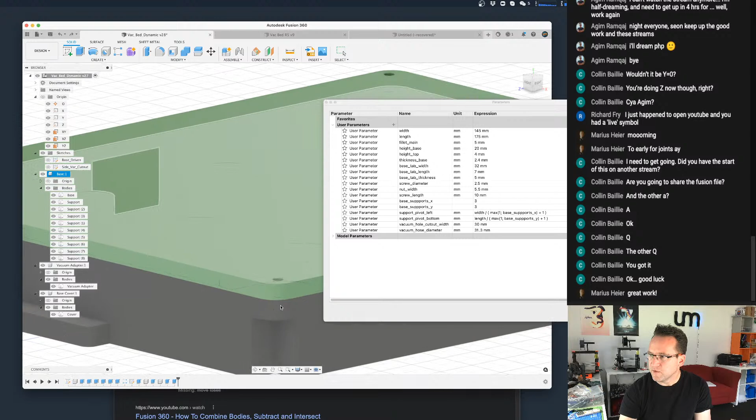You can adjust how this section here - if you're using really long screws, you can adjust that. Just like everything is all dynamic.

So the last bit is to have holes in the top that dynamically create themselves so you don't get overlap. And ideally, I don't know how I'm going to do it, but ideally, if I take the lid off, there's no holes where the supports are. That's going to be very hard. I don't know if I'm going to be able to do that.

But yeah, that's the next step. It'll be the same array stuff that I did before for these, but it'll be holes for the top. And then those holes will have, I haven't added it yet, but there'll be a thickness hole.

There'll be two. There'll be, for instance, there'll be a vac hole thickness. Should actually make it vacuum hole thickness cover,

and we'll say that's going to be 5 millimeters. It's not a thickness, it's a diameter. Should copy all that.